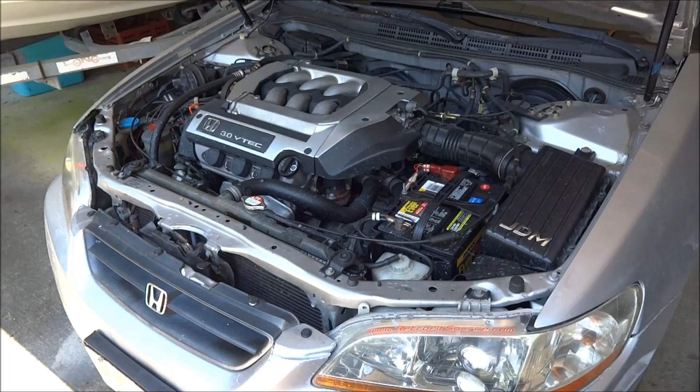What's up, guys? Today I'm going to show you how to change the radiator on a 2000 Honda Accord V6. This is applicable to all 6th gen Honda Accords, whether 4 or 6 cylinder, just slightly different.

First steps first, turn the car on and turn the heat all the way to 90. Let it sit there for a few minutes so the heater can move to its position, and then once that's done, turn it off.

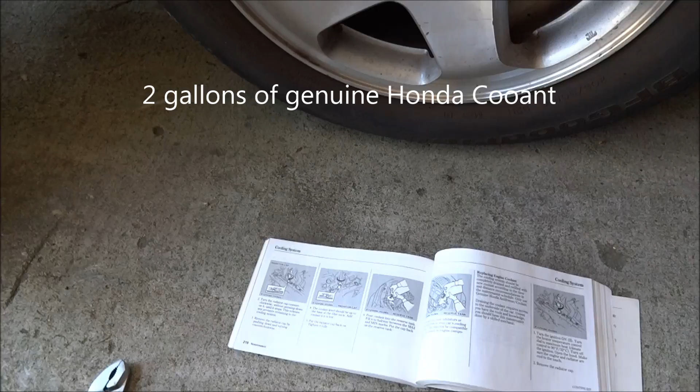Now the tools you need for this are a 10mm socket and ratchet, a pair of channel lock pliers, your radiator, and of course your owner's manual, which you should always refer to, plus a couple gallons of Honda genuine coolant. As you can see, there is coolant just about everywhere.

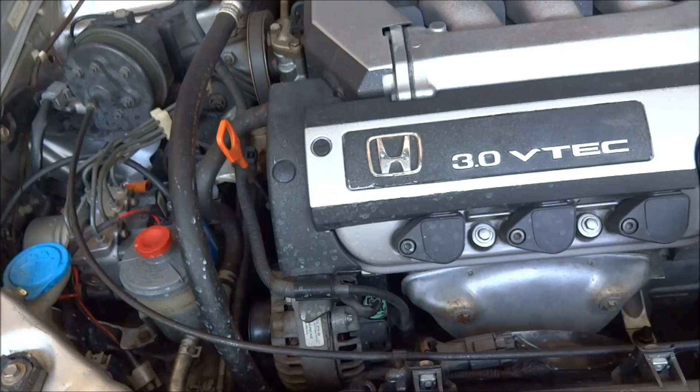And the culprit, a lot of Honda Accords are leaking between this metal and plastic seam, or it has a crack right here from all the cycling of the heat, hot, cold, hot, cold.

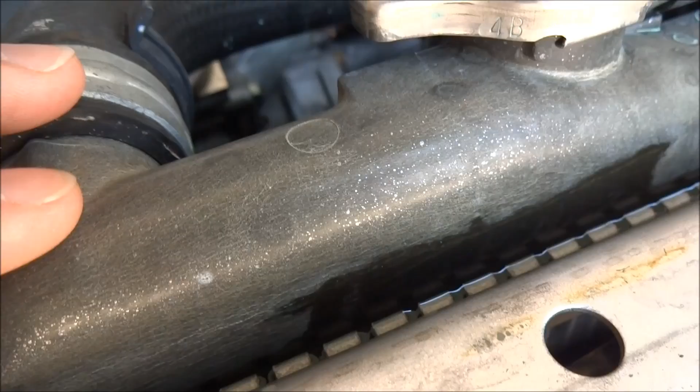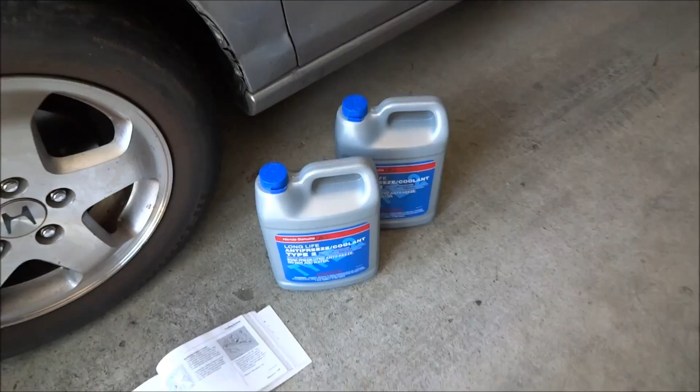Now I'm not an expert, but if your car has green coolant, replace it with green coolant. Orange, orange. If it has blue coolant, replace it with blue coolant. If you mix coolants, you'll form a nasty sludge that corrodes your engine, and your engine will not be very happy. You're gonna have to trust me on this.

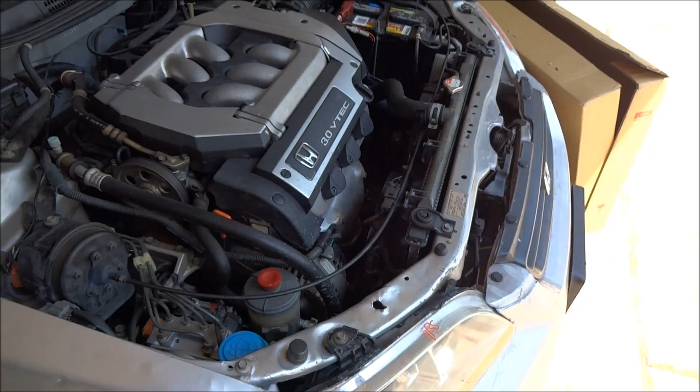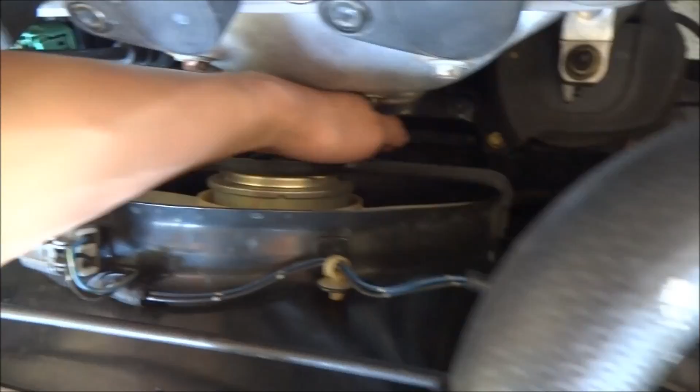I'm gonna do this without a jack, and if you want it to be a lot easier, first remove all the cooling fans. All you have to do is get your 10mm, unbolt, unbolt, unbolt, unbolt. Take this fan out, and then there's a hidden bolt down here that you can feel once you take this fan out. I forgot which one's which.

One of them's a cooling fan, one of them's a radiator fan. So if you have air conditioning equipped on this car, you have another fan. I'm not sure which one's which, but for whatever reason, the silver bolts go on this fan—I believe this is the cooling fan—and then these little bronze bolts are on the AC fan.

And then after you get these bolts removed—this is kind of an unprepared video, it might be a little bit longer, but that's fine—as you can see, it's already loose. You can unscrew this and go ahead and take it out.

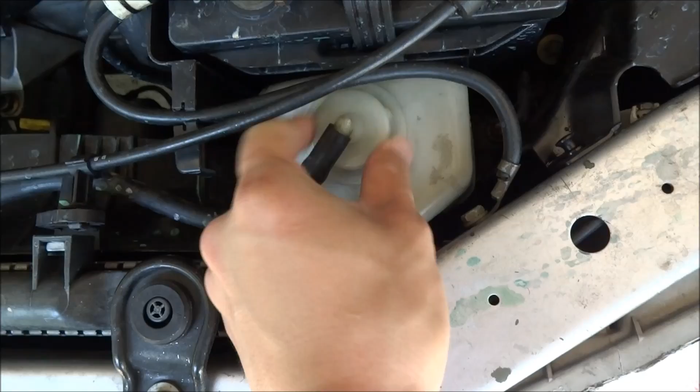Remove this battery cable, unclip it from here, pull this straight out, let it drip, and then you can pull this reservoir straight up and out like that.

Put this aside. As you can see, it's kind of like water now because it keeps leaking. I just added water instead of coolant, which isn't a good thing because it corrodes. Put it right there, hopefully it won't fall.

Then you have this cruise control cable that's clipped on. You should be able to just pull it straight out, hopefully, somehow. Or you can just undo this clip. How about that? Or not. Oh, there we go—just kind of push it down, I guess. There's another clip right here. Just push it down like so.

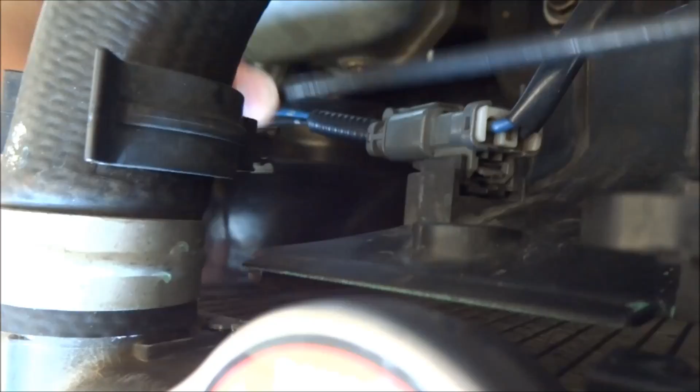And then you have this electric connection. Just push this little tab in right here and pull. I guess I should do this before—so much harder to do when you're recording. And then you should be able to pull straight out once you get this untangled.

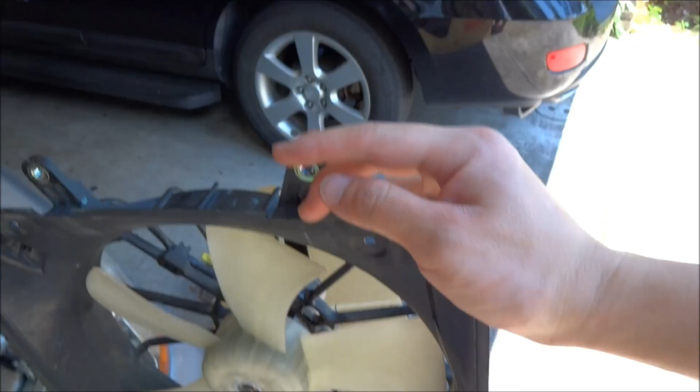And now that you have room, you can just feel down there, way down here, and there should be a bolt. Make sure your car is not hot, by the way—this exhaust will burn the hell out of you. And you should be able to feel a bolt, and it shouldn't be too tight. You should be able to just get your socket and feel for it.

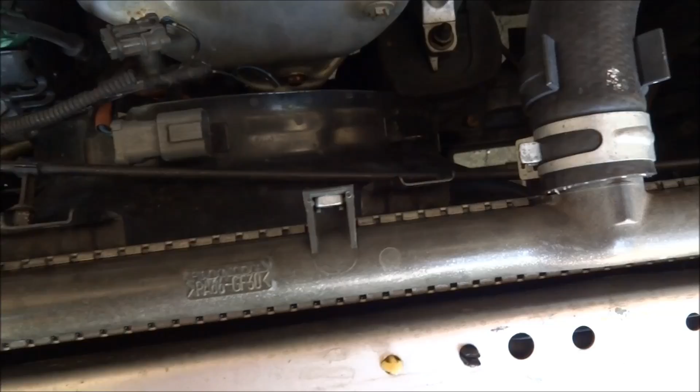Same thing on the passenger side. You gotta disconnect the cruise control cable here, or it's just wiring or something like that. The fan connector, one of these little pinch clips—pinch either end. Same thing down here, and you also have your air conditioning clutch wire down here that is also connected to the cooling fan on the passenger side, or AC fan, whichever one it is. And this one is a lot easier—just get the cruise control cable out of the way and pull straight out, like so.

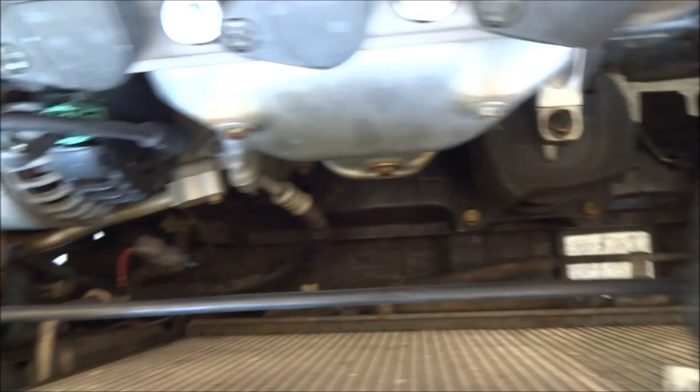Put that aside, and now you should be able to see everything. Now when I bought this car, the splash shield, this little plastic piece on the bottom, was not there, so I bought a genuine used splash shield, or some people call it a skid plate or aerodynamic piece, whatever it's for.

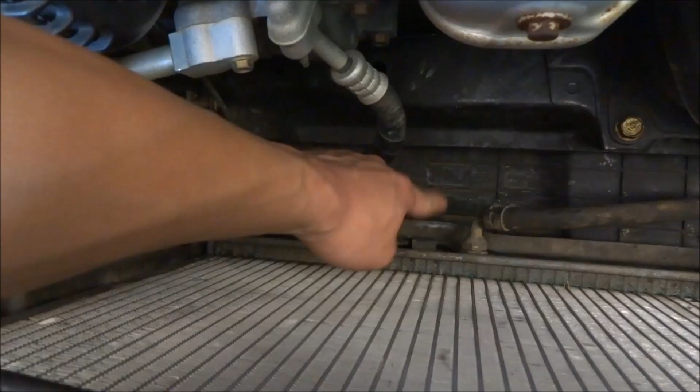Now the 4-cylinder models, the petcock, where you drain the radiator, should be right here. I got the 4-cylinder splash shield. The 6-cylinder should be right here, so I don't have a hole, but you can just reach under there and grab it, since there should be a cutout for the 6-cylinder splash shield. Or if you don't have one at all, that's even better.

You should be able to just loosen it after you put your drain pan under it and open the radiator cap to make it faster. My drain pan is under there, so all I have to do is unscrew it, and as soon as you do that, it starts leaking out. Wow, that's really quick. Never should close this. Oh, that's why I have this open. You can see it's hitting under.

Like I said, this is blue coolant, so you should replace it with blue coolant. I think only Honda uses this coolant. It's longer life coolant.

Open the radiator cap to make it drain a little bit faster. Should be already drained.

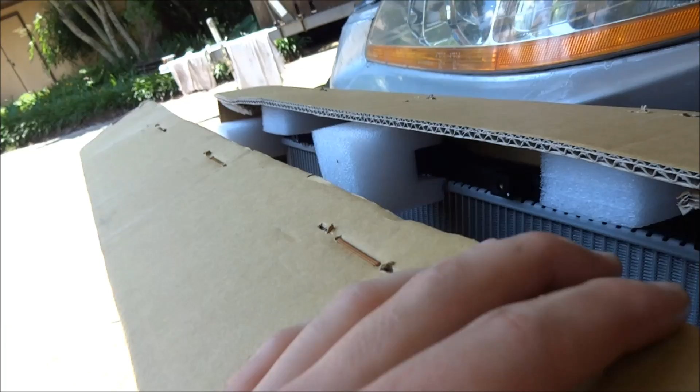Now this replacement radiator is a Denso. Denso is an OEM part, but it's made in Taiwan, so I'm not sure how that is. Taiwan isn't 100% better than China, but it's a little bit better.

And this was off of Amazon. At the time, it was only $70-something. It does not come with a radiator cap, so I'll be reusing that.

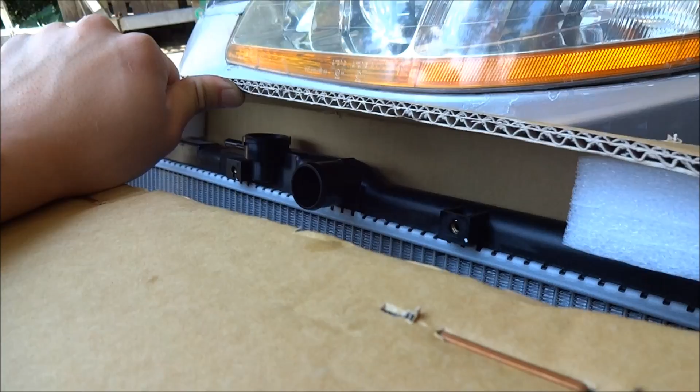Now while that's happening, you can go ahead and disconnect some more stuff. You have these, there's a special name for these, just little locks. If you push it back far enough to these hooks right here, the little clamp itself will actually lock itself, and you don't have to do anything.

And you should be able to just push it back a little bit after you move this little radiator clamp cruise control thing out of the way. Just squeeze with your channel lock pliers. Man, I wish I had a tripod right now. Like that. And then just wiggle it a little bit back.

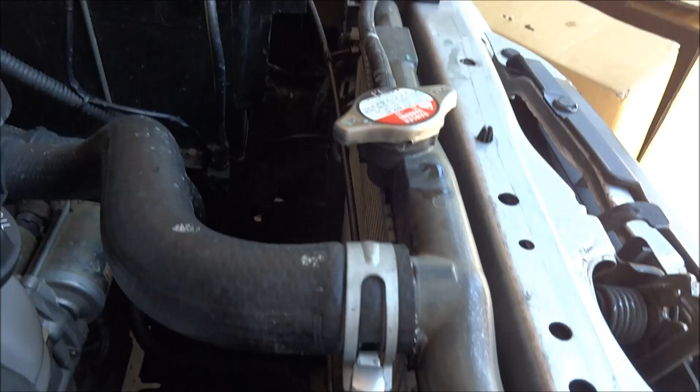And as you can see, it kind of locked into place. Now it's loose. It went under those clips, and all you have to do to tighten it back is just tap it down, but that's for later.

And then grab your channel locks again. Grab your radiator hose and twist it back and forth. Like so. It's really not that hard. You shouldn't use too much pressure, but then again, this is an old radiator, so it doesn't really matter.

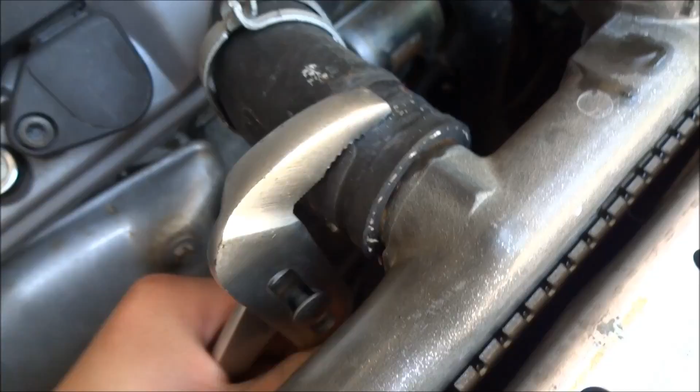You have to use some force right there. Try not to tear the hose. I'm planning on reusing it, and that's a lot of rust.

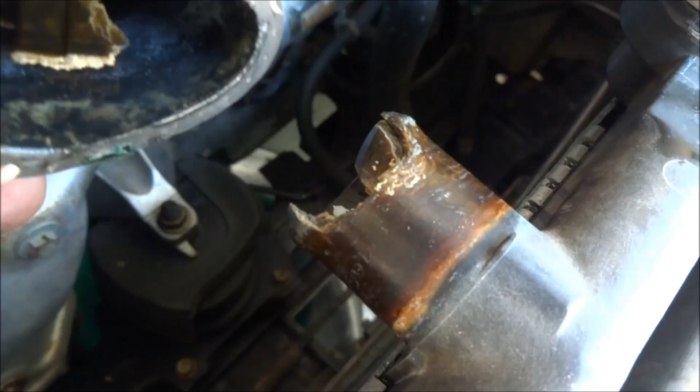Did not know that. This is metal. Oh wow. Huh. That's new for me. That's crazy. I guess that's why you don't use too much force. It just kind of flakes off. That is crazy.

Definitely time for a new radiator. This, by the way, this car is 15 years old. It's a 2000 Honda Accord, and it has about 160,000 miles on the original radiator. This was driven in really hot climates, so the transmission so far is lasting still original. The radiator not so much.

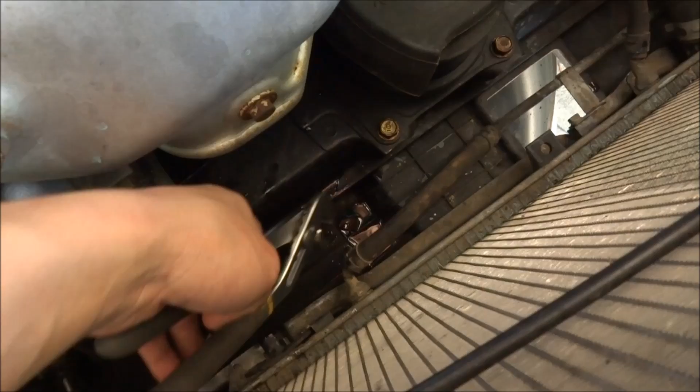Now that's pretty interesting. So you should replace your radiator every 10 years or so.

Now you have these automatic transmission cooler lines. Now this is really tight. It's the same type of clip, so I'm gonna try to do that off camera, save some time. You can see 2 of them. And also down here you have a little ATF bolt that you have to undo.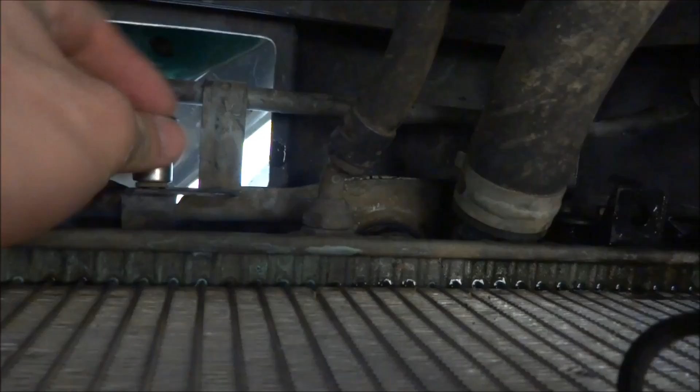I'm having a little bit of trouble getting these off because the clamp is facing the bottom, so as you can see I don't have any leverage right here. So I'm trying to think what to do. I'm seeing if I can pull the radiator out. I really don't want to take the splash shield off, it's a lot more work. It's just a bunch of plastic clips, but it's still a lot more work.

And I already got this side undone, and I'm sure all I can do is just pull it out. Oh, there you go. Oh, and it's leaking pretty bad. So let me see what I can do with this side real quick.

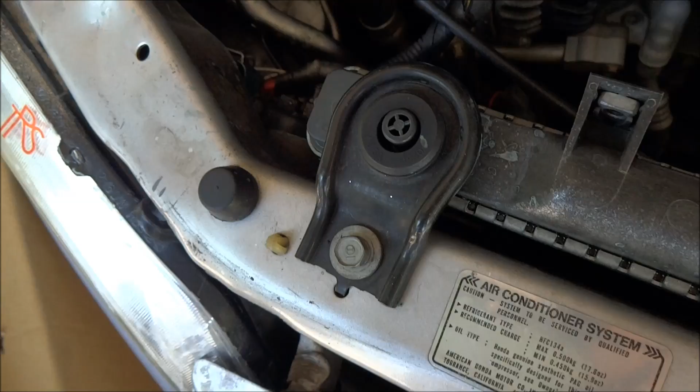Now you can also undo these sides. These are also 10 millimeters. They're holding the top of the radiator. Now that those are gone, you should be able to just pull this out too. It doesn't have to be, all these steps don't have to be in this order. And put this to the side too as well.

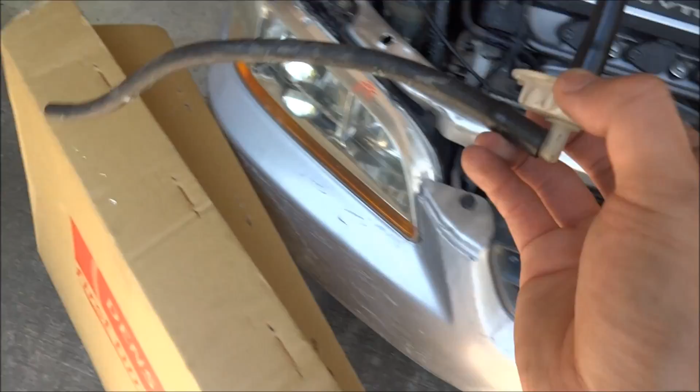Try not to get it dirty. Put this side in, like that.

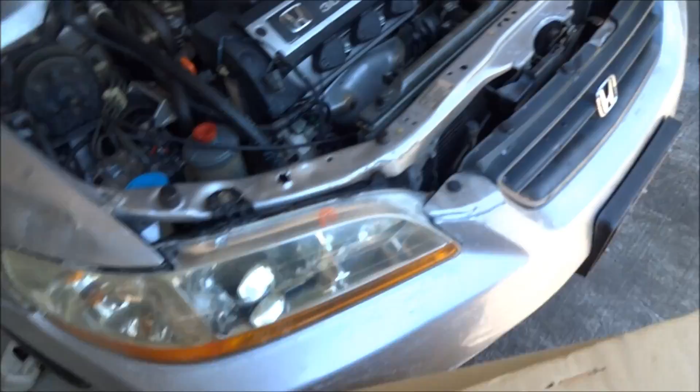Let's see if we can pull it up so we can get better access to that right there. Of course, I'm going to do it off camera.

Looks like you also have a little hidden ATF bolt down here next to the return line. It's right under here, right under that little tab right there.

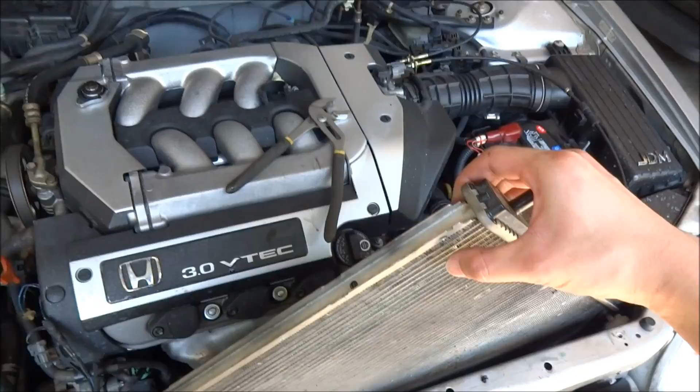Now you should be able to tip the radiator out just like this, and now you have access to the bottom of the clips. As you can see, it's a little bit easier like that. Get your channel locks and pull them out.

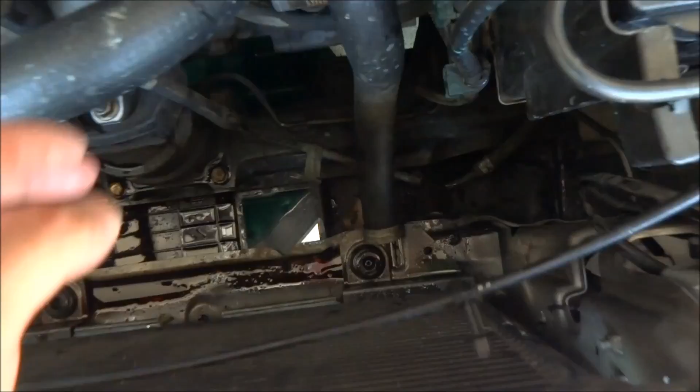Now the automatic transmission hose, I pushed it up and put it towards here so it won't be dripping everywhere. And now it's officially out. The bottom radiator hose was a pain to get off because it was stuck on there pretty good.

Now what I'm going to do is try to get a hose or something and rinse this down. There's a bunch of oil and all that, and I don't want that messing with my new radiator. Make sure that these little rubber bushings are still in here. You can remove them and clean them if you want.

Then I'm going to compare the new radiator to the old radiator, and do the reverse of removal.

Now that everything is nice and clean down there, I'm going to begin reinstalling it.

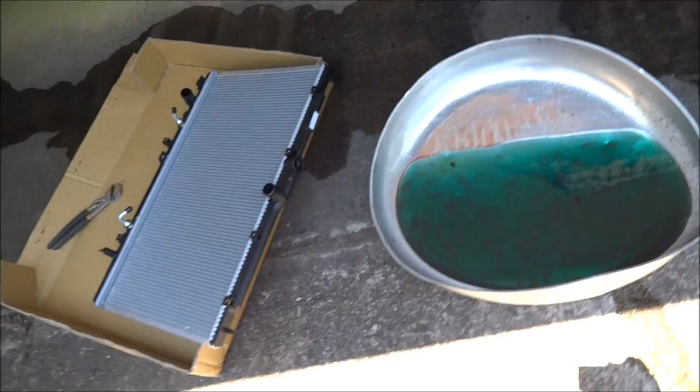Now, something you should make sure of: make sure these are tight, real tight, and make sure they line up in the exact same orientation as the OEM.

It was really cool what was inside. It was just like the top part of this in here. That's how it cools it - you run through this short little thing. You think that's enough to cool a transmission? No, it's not, especially when the coolant's really, really hot from the engine already.

But make sure these are tight. These were really loose when I turned it.

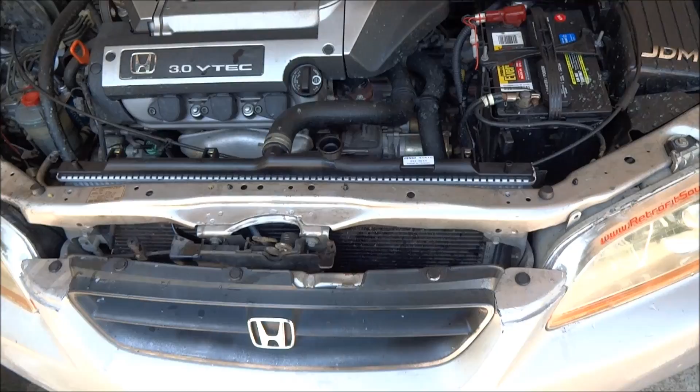I finally got the new radiator hooked back in. I don't have the ATF fluid line hooked up yet. The hardest part was taking this off and putting it back on - it was pretty much glued on there. Putting it back on was even harder.

What I did was get some dish soap and wipe it around. I know soap deteriorates rubber and all that, but it's fine, it should be fine. I got some dish soap and it slid on so much easier, like lube for that stuff.

But anyways, now that that's on, it's tight with the clamp on it. It still moves side to side a little bit, but it won't pull out. So you can put some soap on there to help lube it - just don't put too much soap on there.

This top part went in easier. I think it's because this hose is older, and if this does ever fail, it's really easy to drain the whole thing. So I'm just going to reuse this for now.

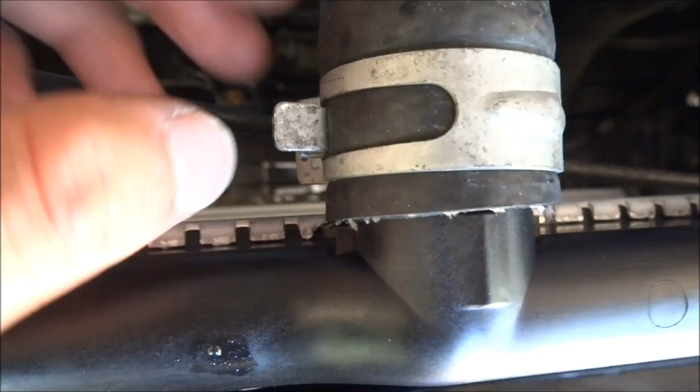Same clamp, same thing. Now just to hook back up the fluids, and you should be set. Also, make sure the clamp is in the exact same position as before - that's what helps seal it a little bit.

I'll show you what I'm talking about. See if, maybe I shouldn't have. Oh well, this is what I do. If you have extra time, go for it.

Man, I really wish I had a tripod.

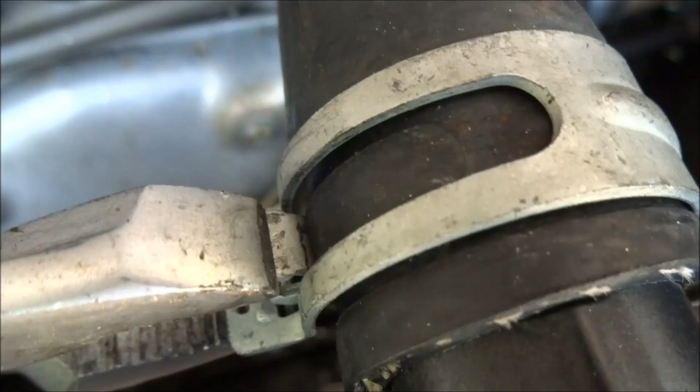If I undo this clip, you can see there's a little indentation right there where the old clip was from the old hose. So I just put it back in the exact same position and close it.

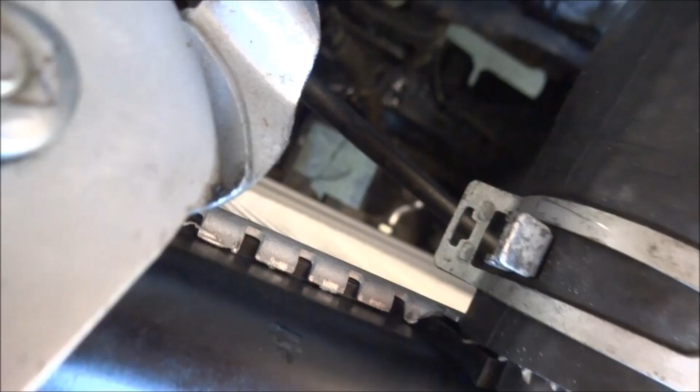And once you lock these, all you have to do is hit it on this side right here with a little tab on it, and it should pop out from this part right here.

Once you have everything completely installed, you can go back and start filling it up. It was a pain to put the return ATF fluid line back into position - I wanted to get it flush like that so it wouldn't leak or anything. I plan on installing a filter later, but whatever.

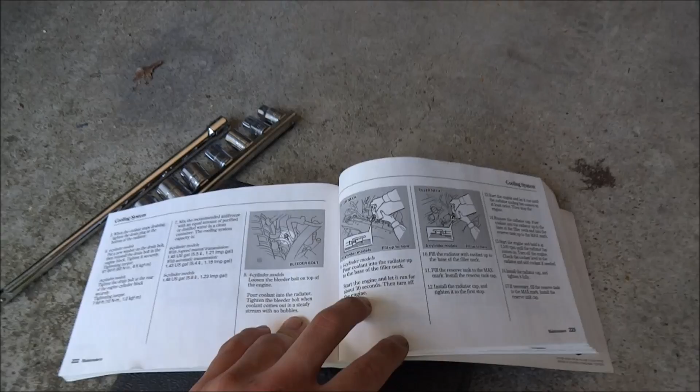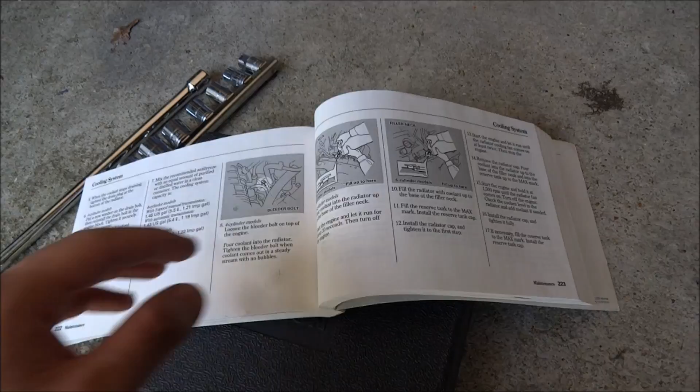But anyways, now you can just start by pouring the coolant into the radiator neck, start it, and then pretty much just read through this, and you can pause the video if you like. Now that we're done, all we have to do is just follow the manual. Basically, this is a V6, so we just follow the V6 instructions.

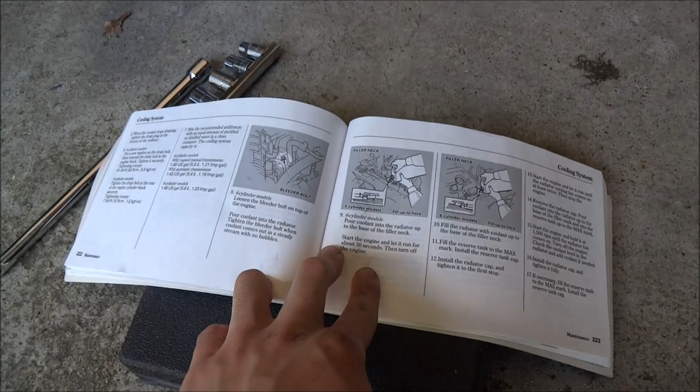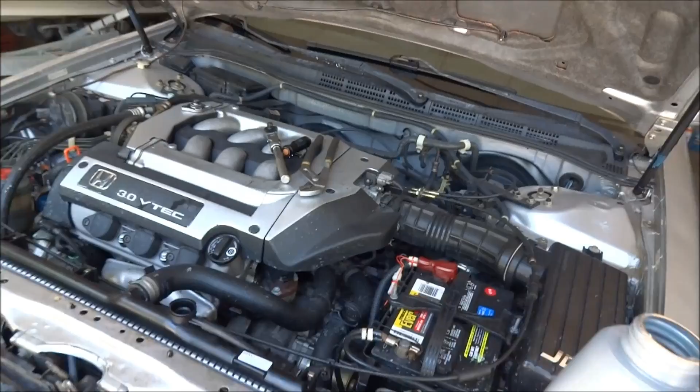Now all you have to do is pour the coolant to the base of the filler neck, and then let it run for 30 seconds. This is genuine Honda blue coolant. Pour it in slowly. There is not a bleeder valve on this car, it is only available on the 4-cylinder. Maybe I should get some kind of funnel, that would probably be great.

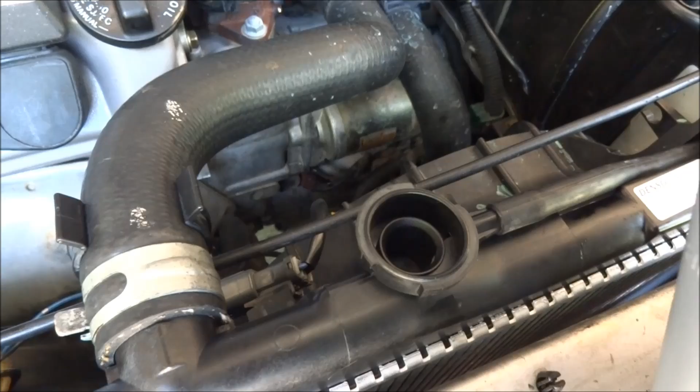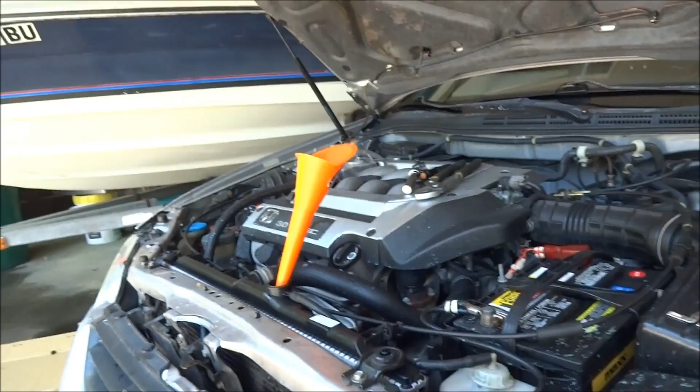Oh yeah, I'm definitely getting a funnel. Now, since this car does not have a bleeder valve, I chose the smallest funnel I could find. It is important that you do this as slow as possible and let the air come out slowly while you're pouring this in, so this is like the thinnest funnel you could find.

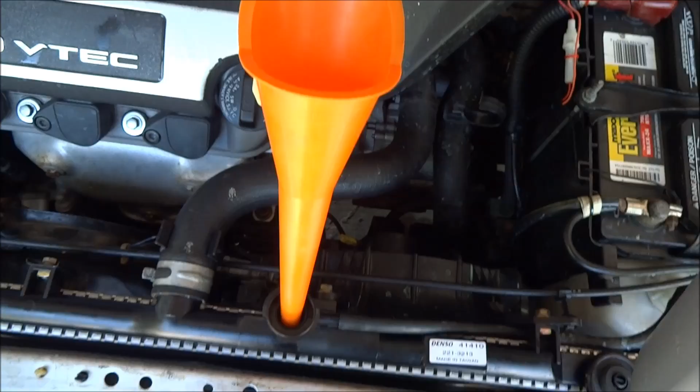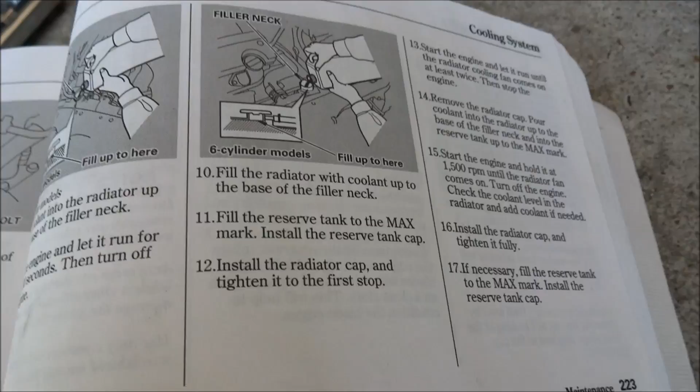Now it is a little bit fuller than the filler neck, but just like the manual says, I'm gonna have to start the engine for 30 seconds, then turn it off. And as you can see, after you do that, you fill it up again to the base of the neck, and it's a little bit overfilled, just a little bit.

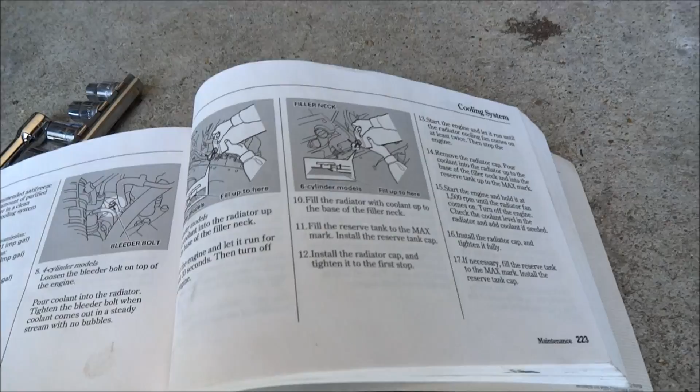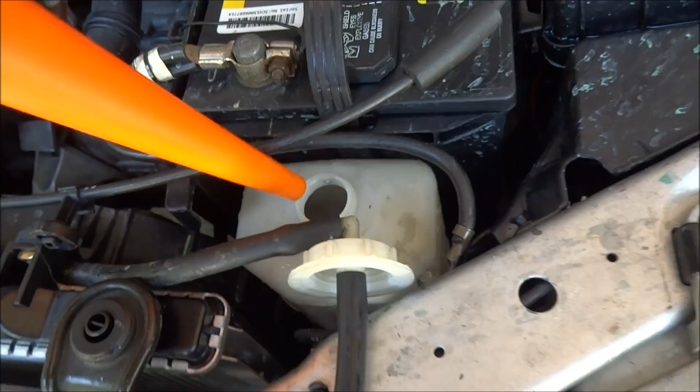Next step is to fill the reservoir up to the max. So you take this and fill the rest of it. Take this little thing out, and on the edge of here there should be a min-max mark somewhere, right here. It's kind of hard to see.

Okay, wow, one bottle is lasting longer than I thought. But then again, there still needs to be coolant inside of the system itself. So that is the max mark.

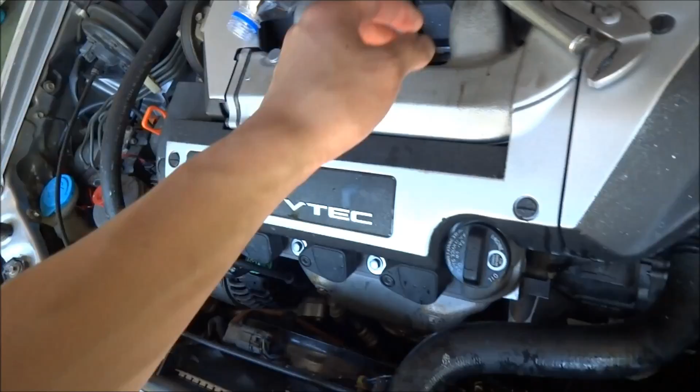And now, tighten the radiator cap to the first stop and start the engine until the cooling fans run at least twice. So I'm reusing my old radiator cap, and as you can see, it has 2 stops. That's the first stop, that's the second stop, and that's fully closed. And that is weird, huh.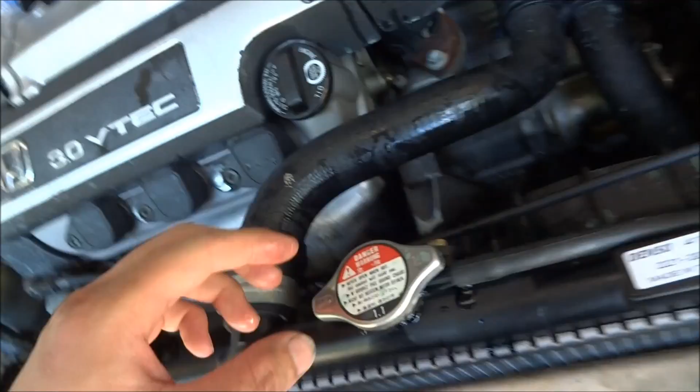I haven't tested this yet. I didn't realize it didn't close all the way. It looks like that is where the stop is, so as you can see, it kind of just stops right there. So this is the first stop right here, and then start the engine, let it run until it is warm.

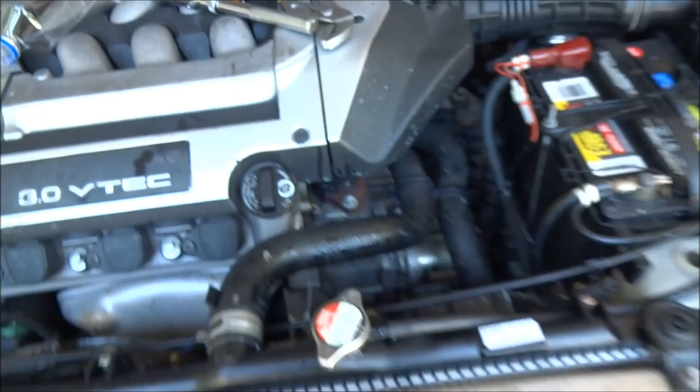And now it says to stop the engine, now that the cooling fans have just stopped. I've never let my car idle that long. It took like at least 15-20 minutes for it to come on.

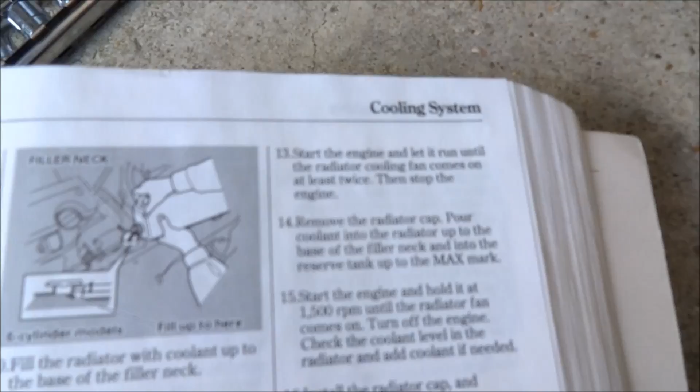And now it says, until twice, remove the radiator cap, pour coolant into radiator until base, and fill the tank until max. That's why you do not close it all the way, and put it on the first stop.

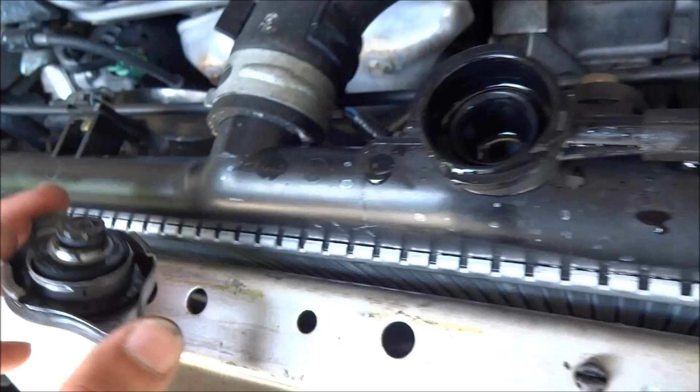This is really hot, so it doesn't explode out. It made a pop noise. That's really hot. And yeah, it looks like it went down just a little bit. Let's fill it up real quick.

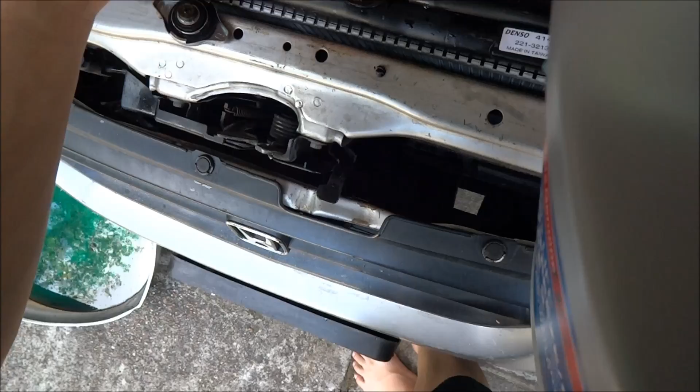I think that actually is the base of the filler neck, believe it or not. But just because I'm me and I do what I do. You can see it come back up again. Just because I can, overfill it just a little bit.

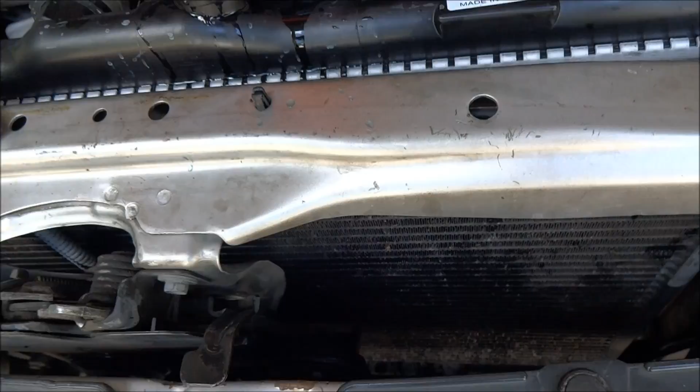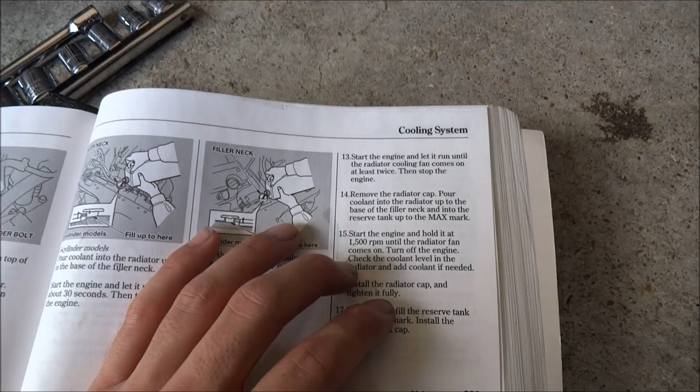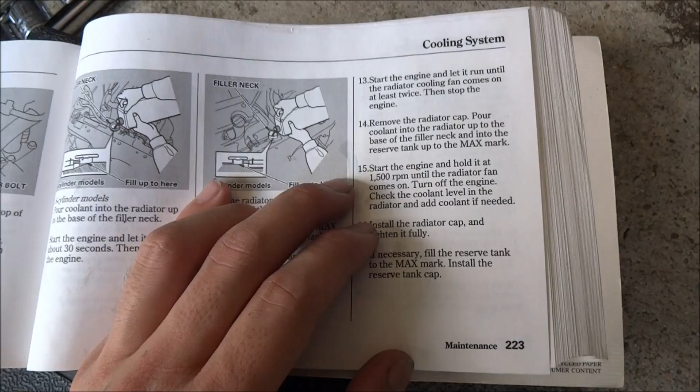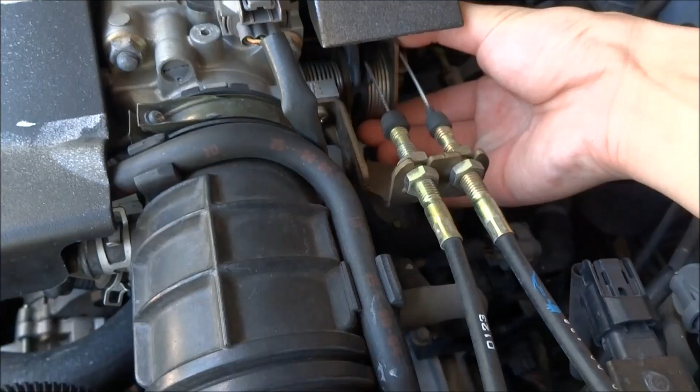I can hold the throttle right here. Maybe I should put it back.

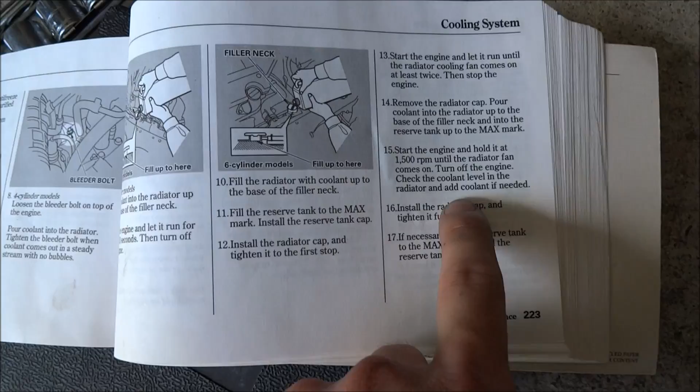Now it says turn off engine, check coolant, add it, install radiator cap, refill reservoir, and you are done.